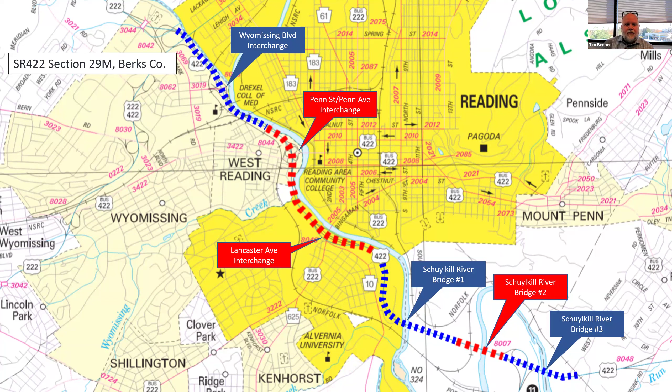The first phase of construction is what we're calling section PH1.

It is a breakout piece of the original project. It is the centerpiece of the original project. It is in essence for the Penn interchange and the Lancaster interchange, this couple of miles right here, which is the core of the project, as well as down by 176, addressing an issue down there with the acceleration lanes coming off of 176 on the 422 westbound.

With these two structures down here, what we're calling Schuylkill River Bridge 2. That's just because 422 crosses the Schuylkill River 3 times in our project. So this is the project we're going to be covering today. It is the first breakout piece of the overall 422 West Shore bypass project.

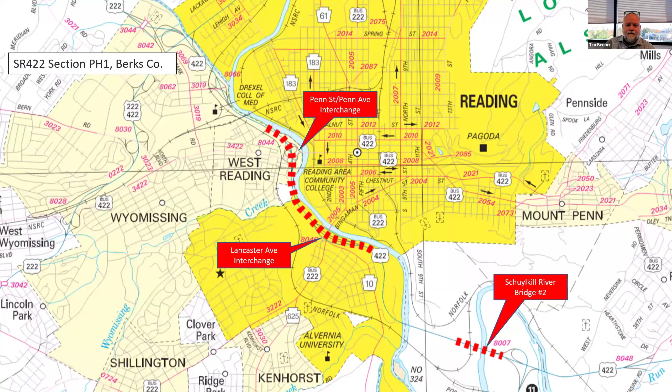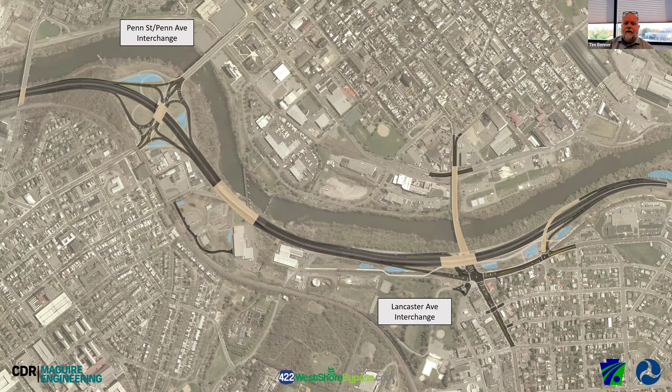So graphically, that's what this looks like. We'll get into all the little pieces as we go through here. Again, this starts here at Buttonwood. That's the western piece of our section PH1, covers the Penn interchange, what we're calling the viaduct structure here by First Ave and Lancaster Ave. You can kind of see by the graphics here that the interchanges are complete reconfigurations and reconstructions. That's the centerpiece of the PH1 project.

And as we move down to the other piece, it's kind of a little bit of a standalone piece that's appended here, to address an issue down here at Schuylkill River Bridge 2. Everybody knows the Trumpet interchange here at 176 when you're coming up 176 heading towards Reading. This will address that issue and replace this structure here over the Schuylkill River. There's also a structure right adjacent to it that goes over Norfolk Southern, and since the bridges are so close to each other, we're going to replace both of them at the same time.

You'll notice that there's a slight alignment shift here, and that's because the existing bridges on 422 are twin girder structures. There's two main girders that carry all the traffic on these structures, so I can't stage traffic on the existing bridges. So we're building half the bridges upstream, shifting traffic, and then building the second half downstream. That's why you see that alignment shift at that location.

And again, just so everybody understands what the typical section is when we're all finished the 422 projects, there will be 3 12-foot lanes each direction on 422 and 10-foot shoulders inside and outside. So you'll end up with a 22-foot median, 3 12-foot lanes, 10-foot wide shoulders. So a considerable widening in this corridor from what is there today.

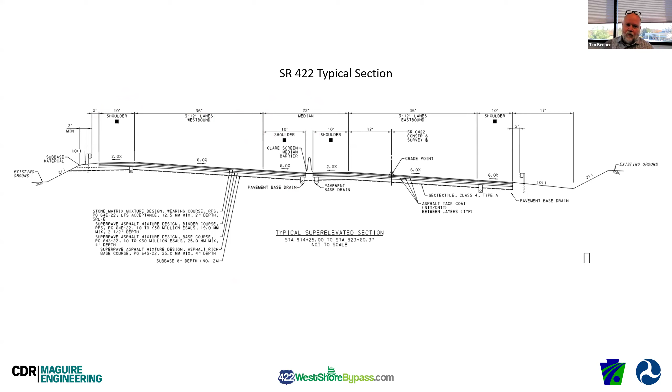So I'm going to walk the project in a little bit more detail here as we move west to east through the project. As I'm going through it, I'm sure people may have questions at the end. Feel free. We can zoom in on any detail here and talk it through. So we're starting at Buttonwood Street Bridge. A lot of you know that there was a major rehabilitation on the Buttonwood Street Bridge years ago. This project will touch that bridge again.

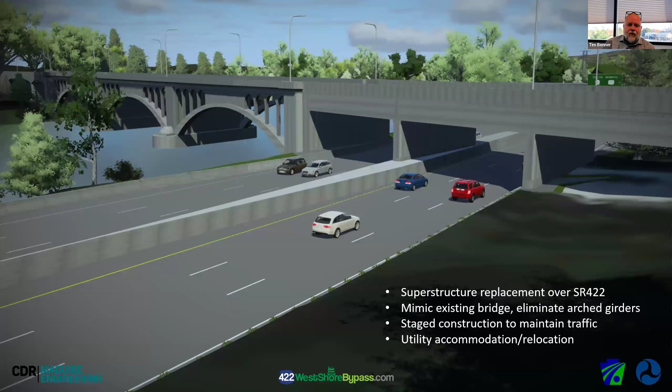In essence, what we need to do to get our 3-lane section of 422 under there is replace the 3 spans that go over 422. We're not touching the arch spans that go over the river, but the 3 spans that go over 422 right now, if you recall, have haunched girders. And when we need to squeeze 3 lanes through there, I can't get vertical clearance. So I need to take those haunched girders out, put flat girders in there to get vertical clearance for 422, and get my 3 lanes in there as well.

Buttonwood Street Bridge is on the National Register. We got to be real careful on what kind of modifications we do here. So the span arrangement is going to be the same. The look of the bridge when we're all finished is going to be identical to what it is today, except for those girders. Instead of the haunches, there'll be straight girders across there.

Some people may think, hey, why can't we just lower 422 here to get the vertical clearance? The issue at this particular location is 422 is actually in the 100-year floodplain for the Schuylkill River. So if we lower 422 here, it would actually exacerbate that condition. So we're keeping 422 where it's at and adjusting the structure to get our vertical clearance. And again, we're trying to mimic as best we can the existing structure so we don't have an adverse effect to Buttonwood Street.

This replacement of these 3 spans is laid out to enable staged construction on Buttonwood, so we can maintain a single lane on Buttonwood with temporary traffic signals at each end, so we can keep traffic moving across Buttonwood while we do this replacement. And then there are some heavy utilities on those spans, which we'll need to accommodate and relocate as part of the project. So when all is said and done, we'll have it configured so we can squeeze our 6-lane section under the existing bridge.

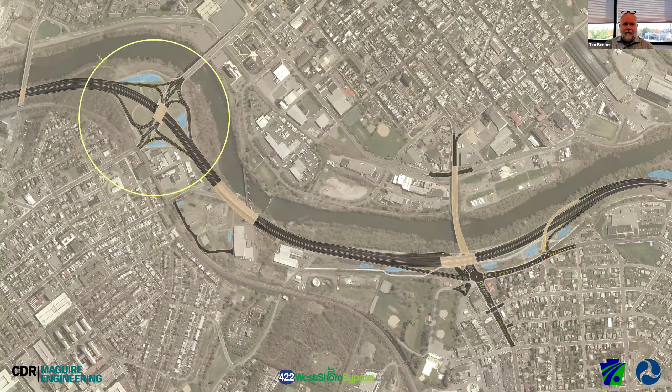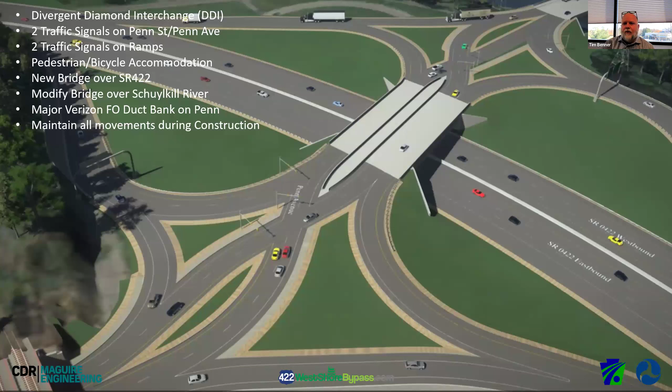You can kind of see at a high level here that we're going to completely reconfigure that. But we are hemmed in between, remember, the railroad on the West Reading side and the existing Penn Bridge over the Schuylkill River on the Reading side. This is a rendering of what that new interchange looks like. This is what's called a divergent diamond interchange.

If you look closely, you'll see that we're putting 2 lanes of traffic each direction like there is now, but traffic actually crosses over to the left-hand side of the road. What that does, it enables a free flow exit here and eliminates those left turns at a traffic signal. So if you follow through, it crosses over to the left-hand side. We have the exits, and then it crosses back over to the right through our interchange. That's a divergent diamond interchange. It's a lot more operationally efficient than what's there today.

It does introduce traffic signals. If you'll notice here in the rendering, there's a traffic signal at the crossover point on either side. Obviously, we need that because the mainline traffic crosses over. You may also notice that there are 2-lane ramps in here that are signalized. Those are the heavy traffic movements that come into Reading. That would be 422 eastbound into Reading. That movement will be signalized.

It's a 2-lane ramp. And you'll also notice there's a ramp here that's a 2-lane movement into the city of Reading. That is also signalized as we move across the Penn Bridge and into Reading. So we end up with 2 traffic signals on main line, plus the two ramps are signalized. And again, it eliminates those left turns, so the traffic signals are only 2-phase. So again, more operationally efficient.

One of the big things that we talked about in developing this with the communities is that we need to accommodate pedestrian and bicycle movements here. Bicycle movements are accommodated in the shoulders. The shoulder widths here are going to be 6 feet wide. It is the same shoulder configuration that was on the newly reconstructed Penn Bridge over the Schuylkill River. We carry those 6-foot shoulders all the way through our interchange to the West Reading side.

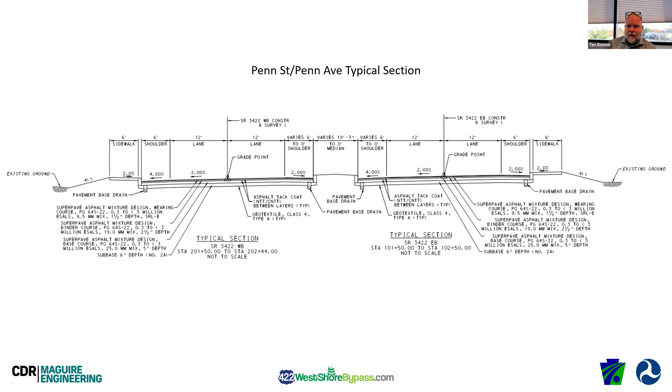As we step down between Penn and Lancaster, we call this the viaduct structure. This is the structure that goes over First Ave, right by the Met-Ed substation here, and the pedestrian bridge, the Thun Trail Bridge that goes across the river over to RACC.

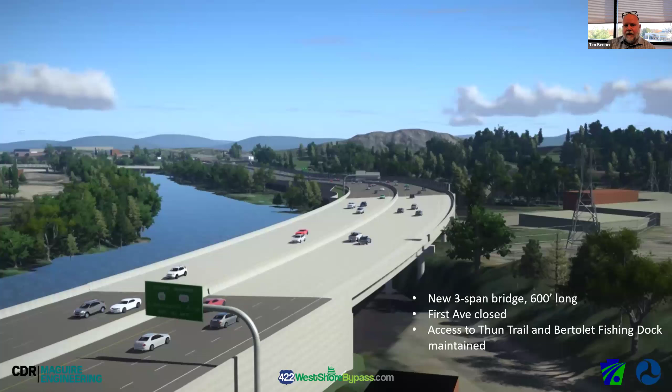This is a very wide area here because we've got 6 lanes in the main traffic, but between Penn and Lancaster, there are auxiliary lanes for the ramps that come out of Penn and into Lancaster and vice versa. So this structure is actually 8 lanes wide when we're all said and done. It's significantly wider than what's right there right now. And we need to build this structure in phases around the existing structure. It's at least twice as big as the existing structure right now.

So that's a 3-span structure, 600 feet long. It's actually a little bit shorter than the current structure, but it's more symmetrical. And what it's going to do is open up underneath the structure where the Thun Trail is, the Bertolet Fishing Dock, and access to the riverfront here.

First Ave will be closed during construction and when we're all said and done here. Just from a construction standpoint and in the final configuration, we just can't get traffic through there. And I'll cover what we're going to do here in a second. But visually, you can kind of see this is a much larger structure, kind of opening it up underneath it as well for access to the river.

Just a little zoom in on what we're talking about. It may be hard to see, but the existing structure is kind of right here. Again, the new bridge will be at least twice as wide as that current structure, 8 lanes plus shoulders down through there. We are maintaining access to the Thun Trail, which comes down through here, and the Bertolet Fishing Dock, which is right here.

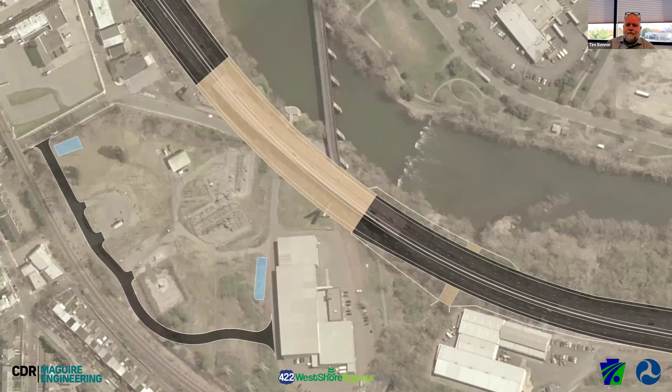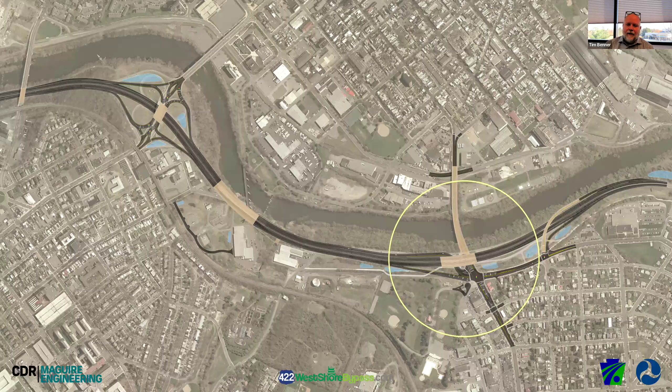So as we move down to Lancaster, just at the high level here, you can kind of see a significant change in Lancaster. Right now, you have the left-hand exits coming in there. You have two traffic signals about 150 feet apart from each other that don't operate terribly efficiently. You can kind of see, again, high level, major reconfiguration.

Zoom in a little bit here. Just point a couple things out. We are changing this to a single traffic signal right here. It's going to be at Lancaster and 10. And we're going to reconfigure this interchange so it's all right-hand exits. You'll notice that you're coming on 422 eastbound. There's a right-hand exit coming right down to that intersection.

And then on the other side, there's a new traffic signal here. This is opposite Fern. Fern will be cut off. We'll put a traffic signal here, and this will be the access point getting back on the right-hand side on 422 east. Westbound, similar. You have a right-hand exit, flyover configuration into the intersection here. That'll be signalized on 10.

And as you move out, whether you're coming down 10 or Lancaster, coming across Binghamton, you come underneath the new structure on the right-hand side and then head towards Penn. So when we're all said and done, we get to right-hand exits on all four movements here in a single traffic light on Lancaster.

It may not be terribly apparent, but we'll zoom in a little bit here. When we're all said and done, there are 6 lanes on Lancaster at that traffic signal, and that accommodates dual left turns. The other thing you might notice here is this is the Binghamton Street Bridge. The Binghamton Street Bridge will be replaced as part of this project, all the way from the Reading side across the river and into the interchange.

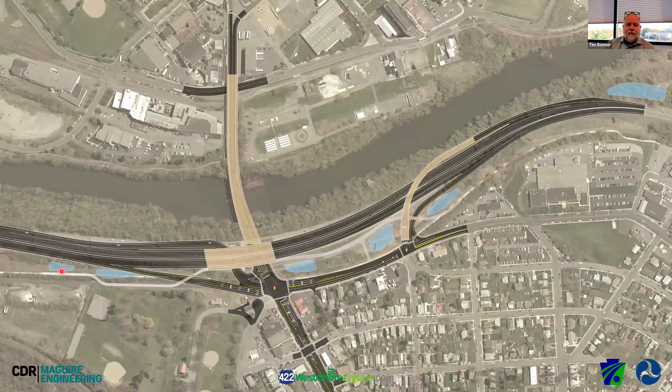And then one other thing, Thun Trail, those of you that use the trail, which is quite a few, Thun Trail kind of works its way through here right now. There's that existing ped bridge that goes over top of Lancaster right here, and then we continue on through. You'll see that we're accommodating Thun Trail. We wind through the interchange on the new structures, over the ramps, and then back over on the west side. So we are accommodating the Thun Trail through the project as well.

That single traffic light makes a big difference from a traffic operations standpoint. It makes this a lot more efficient than the dual traffic signals that are there right now. The other thing you may notice here is we're accommodating peds and bikes on Lancaster. We're providing a 5-foot shoulder. There is no shoulder there right now, but there will be 5-foot shoulders on either side that can accommodate bikes.

We talked about Binghamton Street being replaced. And obviously, when you're getting into roads like Penn and Lancaster, there are a lot of utilities that need to be accommodated, coordinated, and relocated as part of the project. One of the things you might see in here is we talked about Thun Trail. Thun Trail is actually going to be accommodated by the new 422 bridge on the outside here. And then the new ped bridge over the ramp will be actually over here.

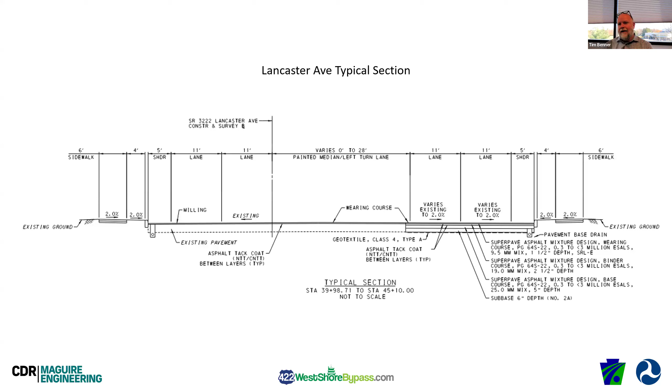One of the things I probably forgot to bring up, and I'll bop back here, the fire station is at the corner here. What we did is we held the curb line on the fire station side and we're widening away. This is the old diner that sits over here. So all our widening is away from this curb line and by the fire station.

But you can kind of see flyover structure here for these movements. And then you can kind of see Thun Trail makes its way through the interchange all the way to the other side. And there is a stretch here on 10 between Lancaster and the new intersection that is slightly wider, providing some additional width for turn lanes and shoulders through there as well. You also notice that there's sidewalks that continue on 10 all the way through.

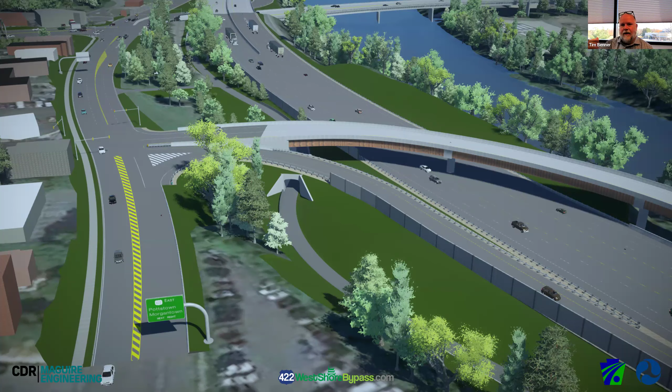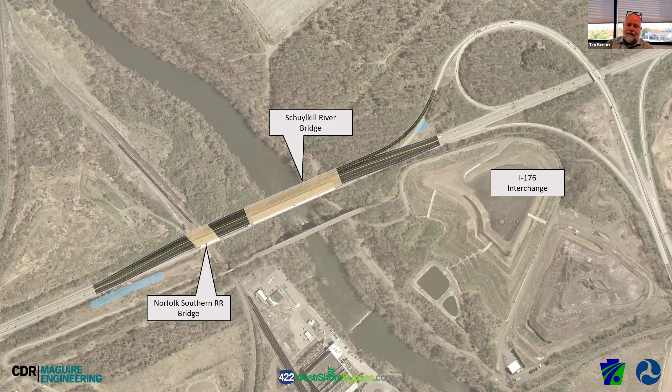So that is Lancaster. That other little piece of the project that we're doing is down at what we're calling, again, Schuylkill River Bridge 2. It's just west of the 176 interchange. What that is going to do is address the bridge itself, which is a twin girder fracture critical structure, and B, accommodate the future 6-lane section plus the acceleration lane coming off of 176.

Just a quick blow up of what that looks like so everybody can kind of get a sense of what we're doing here. This is the on-ramp. Right now it kind of dives in, and the bridge is right here. Everybody knows it's a very short acceleration lane. When we're all said and done, even in the interim condition, when we're just building these bridges, that accel lane will come in parallel and be a normal current criteria accel lane before it merges back in down by the Norfolk Southern Bridge. So you won't have that abrupt diving into traffic when we're all said and done here.

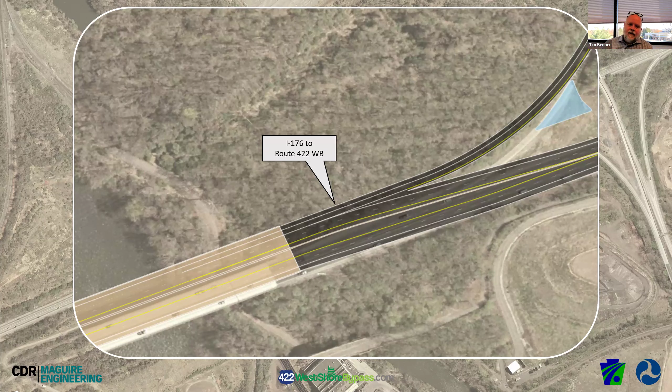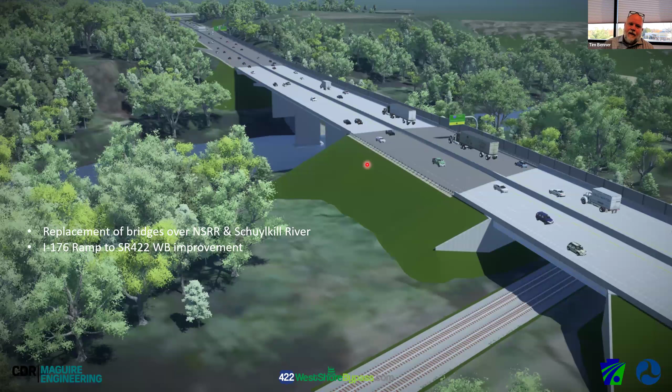So I wanted to kind of walk through, that was a quick overview of the details of what we're doing here, but I kind of want to walk through one of the big pieces that everybody always asks about: how do you build this? And it's a big deal because we can't just shut down traffic. We can't shut down interchanges while we're building this stuff. So we need to accommodate traffic. So I wanted to kind of walk through it in large terms so everybody understands how we get this built, going from here at a full cloverleaf to a divergent diamond.

So I'm going to walk through real quick. Here's what we're going to do. In essence, we're going to build this interchange in halves. Now there will be some small interim phases in here, but in essence, we're building this whole thing in halves. What we're doing is you'll see some temporary ramps coming in here and here. So initially we'll build these temporary ramps, put a temporary signal here and here.

And what that does is it allows us to move the traffic all to one exit ramp instead of having the 2 exit ramps. So anybody coming down to here will end up at this ramp. Anybody coming west ends up at this ramp here. So we put temporary signals in here. It allows us to shut off a lot of these existing ramps and build half of this interchange all at once. All the ramps we can get done, a portion of the bridge we can get done. So we do that phase.

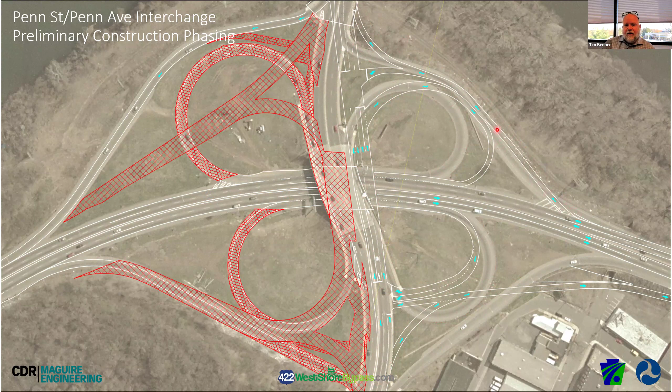Then we flop it over to the other side. So in essence, we built a footprint for the new interchange, or a portion of the new interchange over here. Again, we put those temporary signals here and here that accommodates all the ramp movements. We just direct them into coordinated traffic signals on each end, and that frees up the other side of the interchange to build.

So once we get that all built out, we move into mainline, because I can't build mainline until that current structure is out of the way. That current structure only accommodates the 4-lane section. I need to accommodate a much wider section. So once I get all my ramps built in those 2 major phases, half to half, I can build my main line, and then we can start widening out mainline.

And that happens in 3 major phases, because again, we are keeping 2 lanes of traffic open on 422 at all times during construction. So we cannot take a lane down. We're going to keep them all open. That's why there's a lot of little phases in here to get this stuff built. So even mainline has to be built in 3 separate phases. We go 1, 2, 3. We already had the ramps. And then we get our final configuration in a divergent diamond configuration.

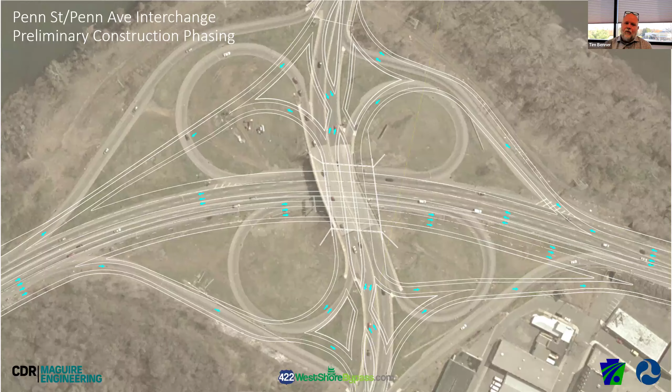So obviously a little bit more complex than that, but I wanted to make sure everybody understood it. We're going to build this, keeping all those movements open. So we're not shutting ramps down. People will be able to get to where they need to go during construction as well.

Walking through Lancaster again, just so everybody understands how this has to get built, because it is a big undertaking to go from that current configuration where we have all those ramps inside on the left-hand side with the traffic signal here and here, how we get from that to the final condition. So the first thing we need to do is build all that stuff on the outside. So we built the off ramps over here. We build a portion of 10. We build all of the new connections here from 10 to 422.

We do that all under traffic. We still got 2 lanes of traffic on 422 in their current locations. We're just building that extra infrastructure on the outside. In that first phase, we also, you can kind of see, remember I told you we're widening away from the firehouse. So we're widening Lancaster away from the firehouse where the old diner was.

Once that's in place, what that does for us is it takes this movement and this movement out of the middle. So I only have 1 lane left in the middle, and I only have to accommodate that 1 movement. That movement is to 422 westbound. When we have that, then I can build a portion of that new structure right down the middle. It's going to look super weird. It's a 2-lane section of bridge right down the middle of those ramps where you got a ramp going on. But that's how we need to stage this in order to piece the whole puzzle together and get this built.

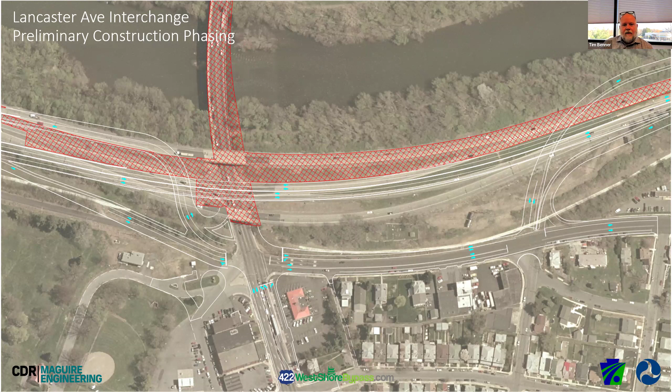So in this final phase, for a time, that connection will be closed. What we're trying to do is make sure that Penn Street is fully constructed and open prior to closing the Bingaman Street Bridge, so there's no traffic queues heading into the Penn interchange. We have that new interchange more operationally efficient in place before we get to this piece where we're closing Bingaman Street. That is the final phase. Once we get that done, we're all said and done with Lancaster.

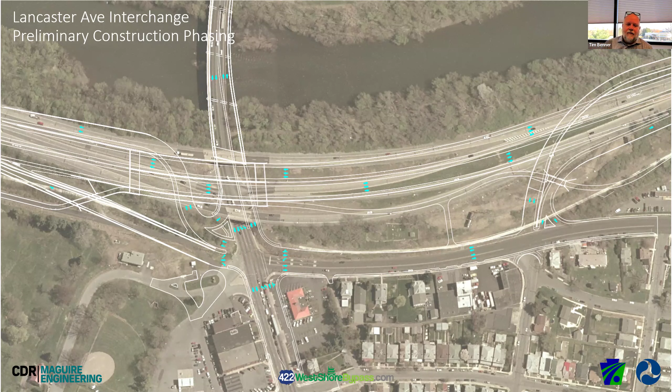So again, just that kind of high level, it's always interesting for people. They always ask me how we get this stuff built. That's how we get it built. It does take time to build heavy infrastructure like this under traffic. Again, 2 lanes of traffic all the time on 422, maintaining Route 10 traffic, maintaining Lancaster traffic. Bingham Street is open except for that final phase.

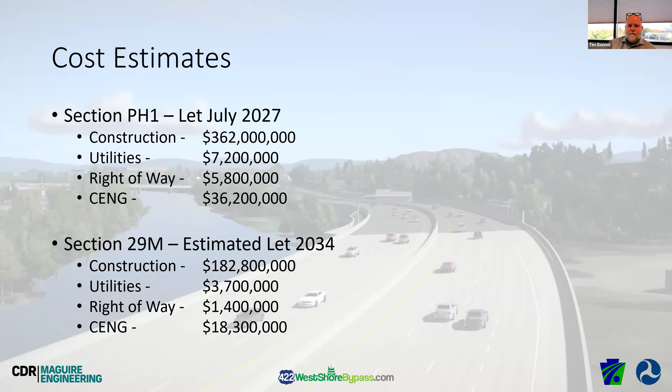So 2 very large projects. And if you're doing the math there, 2027 to 2034, we're looking at about 6 years of construction in that initial phase to build the Penn Lancaster interchanges plus River Bridge 2 and the Norfolk Southern Bridge. So that was a lot. Dave, I'm ready for some questions. If you guys are, I can also jump into another plan if we need to drill down into any more detail. So I'm ready when you are, Dave.

Okay, thank you, Tim. It's an incredible project, a lot of time, a lot of energy going into it. And I think it's interesting to see the accommodations that have been made over time in dealing with the pedestrians and the bike material as well. A number of questions, and I'm going to run back up through them.

Are there going to be any changes on the city side of the Buttonwood Bridge that you know of? On Buttonwood, no, the only thing we're touching on Buttonwood is those 3 spans that go over 422. Let me pop in here real quick. So if you look, I'm going to zoom in, and I'll give it a second here because I know there's probably a little bit of lag, if I can get this going.

So the only thing we're doing while I'm waiting for that to come up is the 3 spans over 422. The arch spans start right on the river side. We are not touching any of the arch spans or doing anything on the city side. We just need to reconstruct these 3 spans. The 2 that go over 422, and then there's an empty span over here, right up against the railroad.

We're actually going to use that empty span to maintain traffic. So I got 2 lanes of traffic going at all times, right? So I need to build out underneath that empty span, shift traffic over, build a span, shift traffic over. So we got to jockey traffic around there. We're going to use all 3 spans to do that, but we're only going to be reconstructing this 3-span piece of Buttonwood. Okay. We have a question.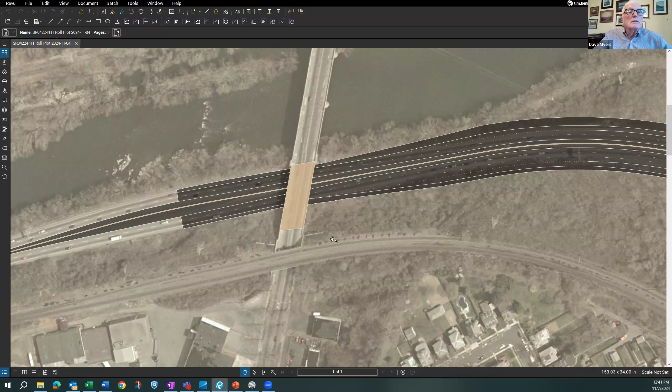What effect do you think all of this will have on VPD development? VPD. Yeah, maybe you can help me out with that one, Dave, a little bit. I'm not sure what they mean by VPD either. Vehicles per day. Okay, thank you. Is it going to be a traffic generator? Okay, I'm sorry.

It will accommodate the current traffic. So right now, obviously, there's quite a bit of congestion in the main corridor and at the interchanges. This is designed for a design year of, I believe, 2050, if I recall correctly. It will accommodate the traffic generation volumes that we're anticipating down through here. That's why it's a 3-lane section.

Will it generate? That's to be seen. It can accommodate the traffic volumes that we need, plus the projections that we project out. We always project 20 years beyond the finish of construction. It will accommodate those traffic projections. Whether that generates additional traffic from development because we now have a corridor is to be seen.

Okay, we have a question about if the Penn Street shoulders are 6 feet wide, why can't the protected bike lanes across Penn Street be 6 feet wide as well? So we're providing the width for it, the same as the existing bridge over Lancaster. It is not a bicycle path per se because it doesn't go anywhere on either end of the project. What we're trying to do is set the table so it can be in the future.

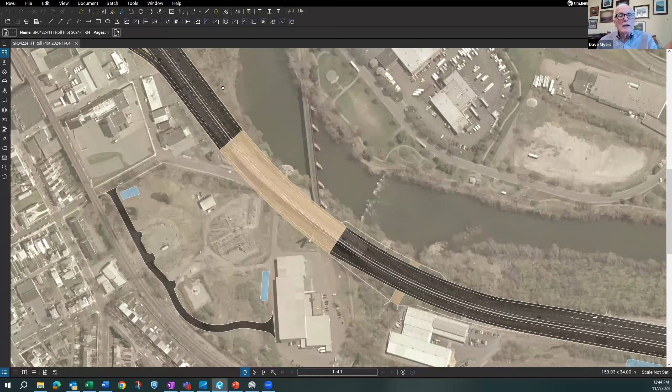That is under discussion right now. So those of you who are familiar, Franklin Street is right here. It's just east of the Penn interchange. It's a 20-foot wide culvert. There's a water line that runs through. It's actually gated off right now. They're having discussions whether that's needed in the future or not.

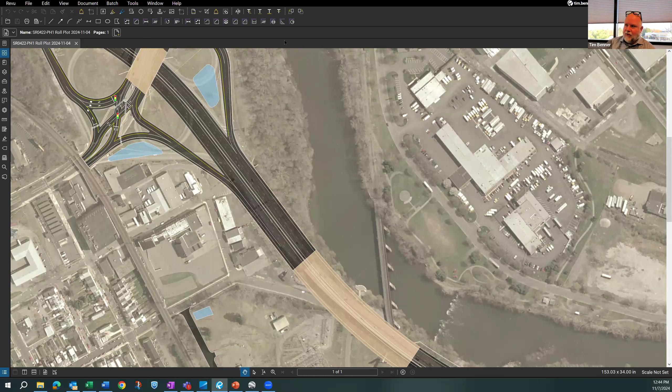Right now, we have it as planned to replace and widen to accommodate a much wider area here. But there is a question whether that is actually a necessary connection at this point, because you can access the utilities and everything that's down here from the ramp over on this side and come back underneath and get there.

That's a discussion point, Dave. Okay.

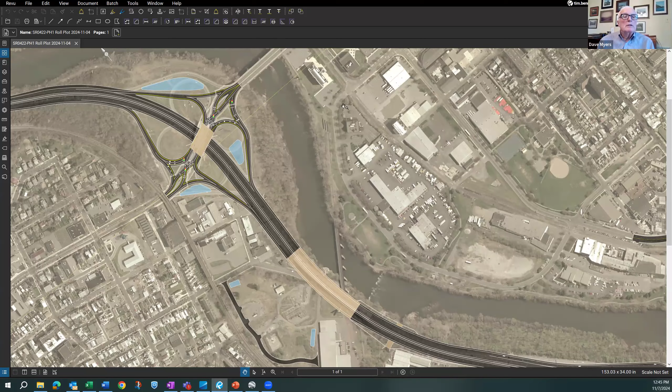What about pedestrian and bike access across the Bingaman Street Bridge? Is that going to be something that's going to be taken care of, added to? So Bingham Street Bridge, we got 6-foot sidewalks on both sides on the bridge, protected from traffic. So you have a barrier between the sidewalk and the road. We also have those 5-foot wide shoulders. Again, this is very similar to what we're doing at Penn. We're setting the table so you can make that connection.

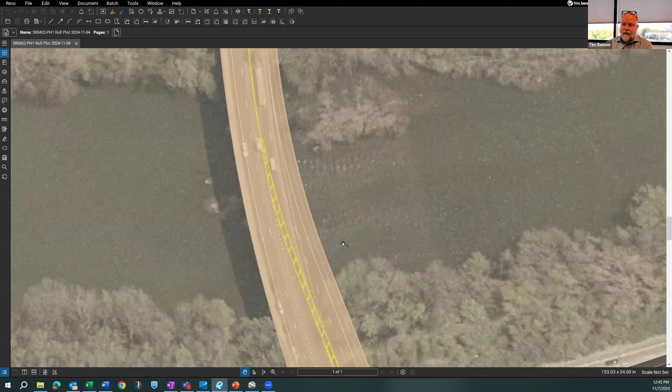So right now there's no shoulder there. There'll be a 5-foot shoulder that can accommodate bikes. It will not be painted out as a bike lane, but it will accommodate bikes all the way across the bridge to the Reading side and all the way through our project area up to 2 blocks off of the interchange. So there will be access to pedestrian and bike paths on the north side of the Bingham Street Bridge? From the surface streets, correct? Yes, from the surface streets.

How long do you think the Bingham Street Bridge is going to be closed? Bingham Street, I mean, that is a large structure. Just to demolish it and reconstruct it takes a lot of time. Plus, in the river, I can't just shut off the river either, right? So I gotta put causeway out halfway, do some demo and a flop causeway. At least a year and a half, if not 2 years.

What speeds it up is that we can detour it. We can shut it down and get after that structure and get it demolished and then reconstructed. I think in our schedule, we have it at about a year and a half right now. Okay. That bridge itself is not a small undertaking. No, it's a big project by itself. Yes.

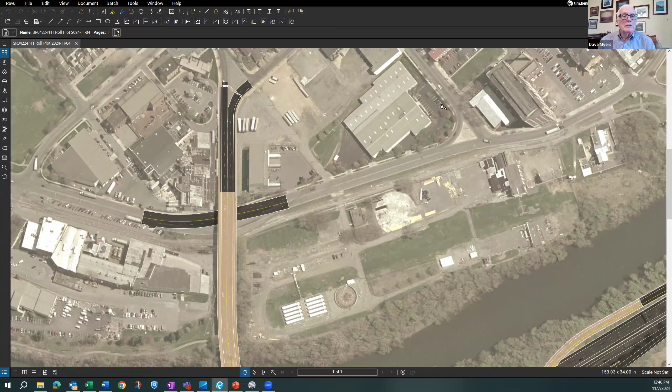If I remember right, there's a cemetery at the location where the new Route 10 is going to come in. What happens to that? Nothing. So the cemetery, for those of you that don't know, is right here. This is the Gerber Fix Cemetery. It's actually right off of 422 right now. Where the trail we have shown here, that's actually today 422 eastbound right here. So the cemetery is literally a stone's throw from 422.

When we reconstruct everything, 422 actually moves towards the river. We move it away and we put the trail between 422 and the cemetery. We are accommodating access to the trail and to the cemetery for maintenance activities off of Route 10 as well. So we obviously don't impact the cemetery, but we're avoiding it, moving things quite far away from it and providing some access to it.

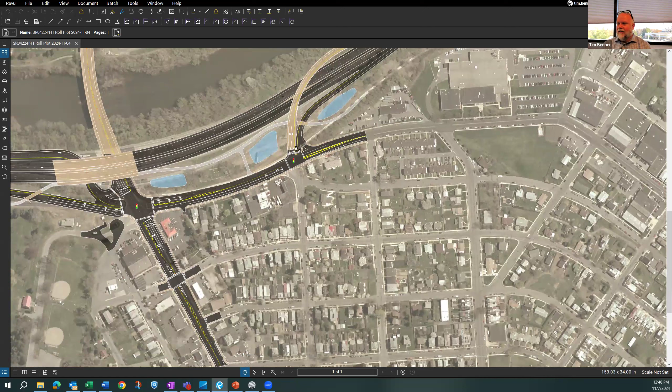Are there any enterprises or businesses that are going to be affected by the relocation of that exit ramp? By this exit ramp, obviously we have UGI down here. The only thing we're really doing here is there's that traffic signal goes in here, cutting off Fern. So that gets cut off here. And really, if I zoom out a little bit, the concern was that people would come off here and say, I don't want to go down to Lancaster, turn left, that they just cut through. We didn't want to push traffic through that residential area. So that's why that is being cut off.

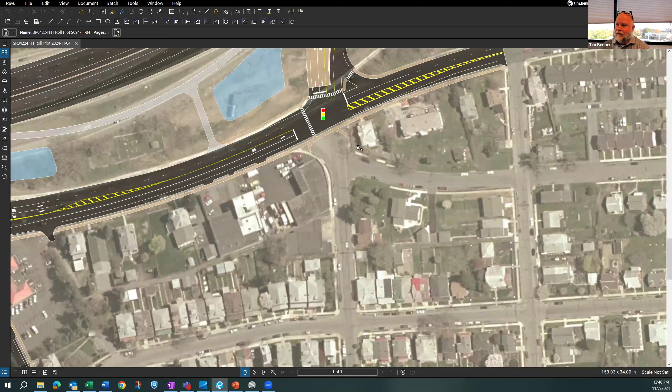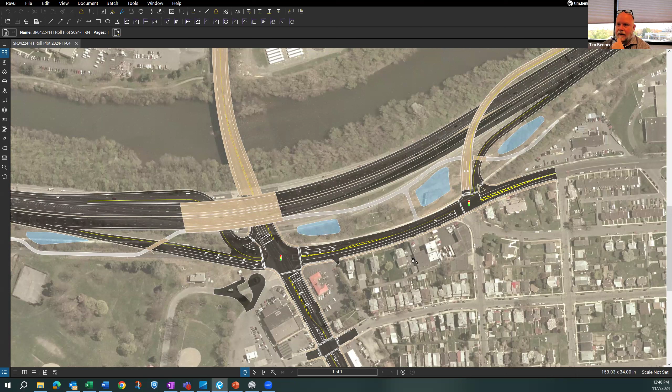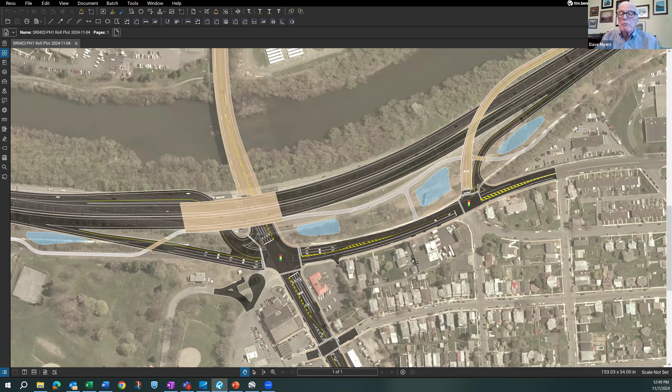I'm going down here through our questions. The Titus Station project, when the project's in process, what impact will that have? So the decommissioning project down here, in phase 1, we're just doing this piece of the project. So Titus Station is south of the Thun Trail here. Where we're at River Bridge 2 and Norfolk Southern, we're replacing those 2 structures, but we're actually shifting downstream at this location, north, I should say.

So, like I explained at the beginning, we need to do alignment shifts here because those 422 bridges over the river are twin girder bridges.

There's only two main girders that support all 4 lanes right now. I can't phase construction those. So we have alignment shifts to build half of a new bridge, get traffic over on it, demo the old structure, and then build half. That's why we're doing it here. But we intentionally shifted the alignment in this area away from the Titus Station decommissioning project.

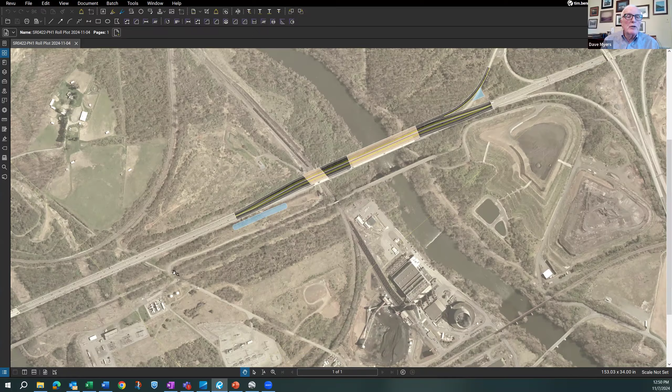Okay. I know there've been questions about the lighting along this part of 422. Is that going to be changed at all? There will be interchange lighting. There's sort of interchange lighting there now. I guess there has been in the past. So, there will be interchange lighting as part of this project. Yes.

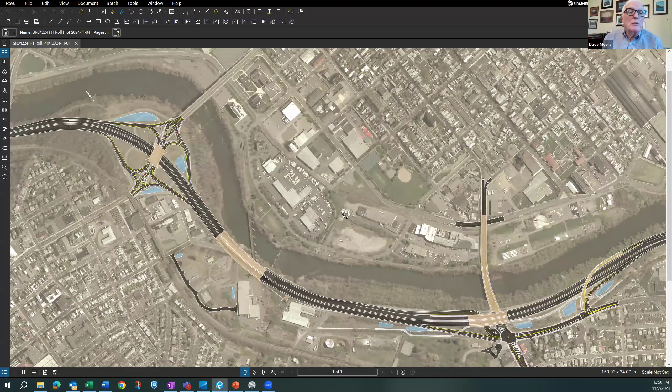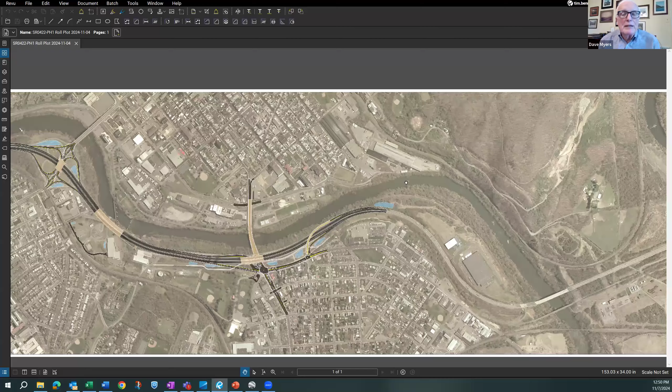And we have a question about what is the impact on traffic east of where you're going to be doing this work over in Exeter Township? Do you think it's going to relocate or disrupt traffic and move it into Exeter Township more than what currently happens?

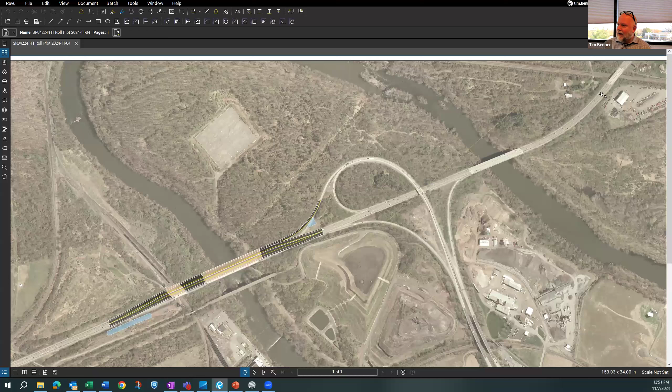Yeah, the overall project ends just on the other side of 176. So when we're all said and done with the West Shore Bypass reconstruction projects, that's both phases of construction, we end right here at the Norfolk Southern Bridge. I believe this is Mascaro right there. That's where we tie in. And if you remember, I said the 3rd lane adds and drops here at 176. So through here and all the way to the end, we're only 4 lanes.

So we do have alignment shifts because, again, we need to replace this off-line because it's a twin girder structure. But from a width standpoint, we're just adding shoulders on the outside. We only have a 4-lane section from 176 east. But the overall reconstruction project, our project, ends right at the Norfolk Southern Bridge, which is right by Mascaro.

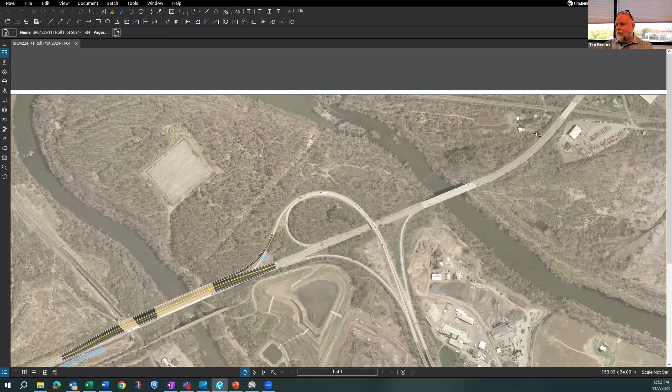So from the beginning of when you start the construction to when it's going to be done, how long do you think it's going to take? You gave us some timeframes, and you're doing so many different phases to the project. Yeah, it takes time to build these large infrastructure projects under traffic. So we're anticipating 6 years of construction for that initial project, that's a lot going on there with Penn and Lancaster. I would anticipate another 4 years to build out that next phase. So all in, I would think we're going to be somewhere around 10 years of construction, beginning to end, to do that 5.2 miles all the way from 222 down past 176.

That's a lot of time for a big project. It's a lot. Yeah. And if you saw the dollar figures, it's a lot. But just in this initial section, there are 20 structures. They might not look like 20, but there are 20 structures in there between all the bridges and the retaining walls down through here, and potential noise walls as well. That's just in that initial phase 1. There's a lot more structures in the next phase too. If you think about this stretch down here by Brentwood, there's a bridge over Brentwood and then 2 bridges over the Schuylkill River that have to be replaced. Those are not small structures.

Slight reconfiguration in 176 just to accommodate the new configuration. And as we move west of Buttonwood, it is very tight through there. So remember, we got 2 overhead railroad bridges coming across there. You got the North Wyomissing below our interchange up there. And then we got the interchanges with 12 and 222. So very tight to shoehorn a lot of infrastructure in, even west of Buttonwood. It's going to be somebody's career doing this for the rest of their career.

Very large undertaking, yes. But if I'm correct, the only part of the project where there will not be traffic allowed anywhere is across the Bingaman Street Bridge, right? Yes, we're accommodating traffic movements in every other phase, all the ramps and all the side roads.

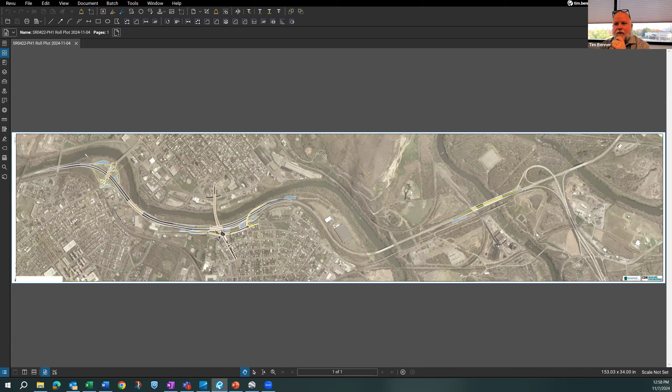And I'm going to call on my colleague, John Weidenhammer, who had a question. Let him ask his question. It's the last one we have for you.

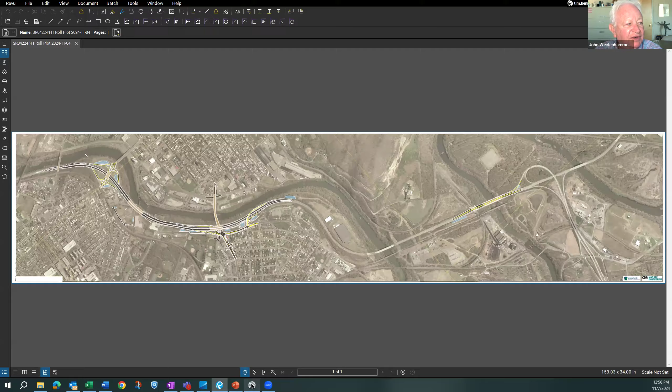John? So something that I've been curious about for a long period of time is, was there ever any consideration of extending 9th Street south out of Reading and connecting up with either 422 or 176 to provide a secondary access further east on 422 to come into the city? In other words, go sort of in a north direction off of 422 or 176 to connect with 9th Street to come into the bottom of the city. There's an existing road there, not very well improved, but it would alleviate some of the traffic going maybe another 2 miles to get to Bingaman Street.

I think I'm going to pitch that one to Alan too. Alan, any insight there? Yes, never eat lunch during a presentation.

The idea was broached. If anybody is familiar with the current 9th Street right now, it's built basically as a ledge on a cliff with a railroad track below it and a steep mountain above it. There are severe environmental impacts to trying to widen that roadway to bring it up to current design standards. Even if you could get around the end of Neversink Mountain, you'd still have to build an interchange somewhere out on Poplar Neck.

We've got a very narrow window in there that probably is not able to meet current design standards for spacing between interchanges, as far as the distance between 176 and where the on and off ramps would be for any new interchange in that area. And then accommodating that into those adjacent crossings over the Schuylkill River. So it was looked at cursorily, but the negatives far exceeded the positives. Thanks, Alan. That answers my question. Thank you.